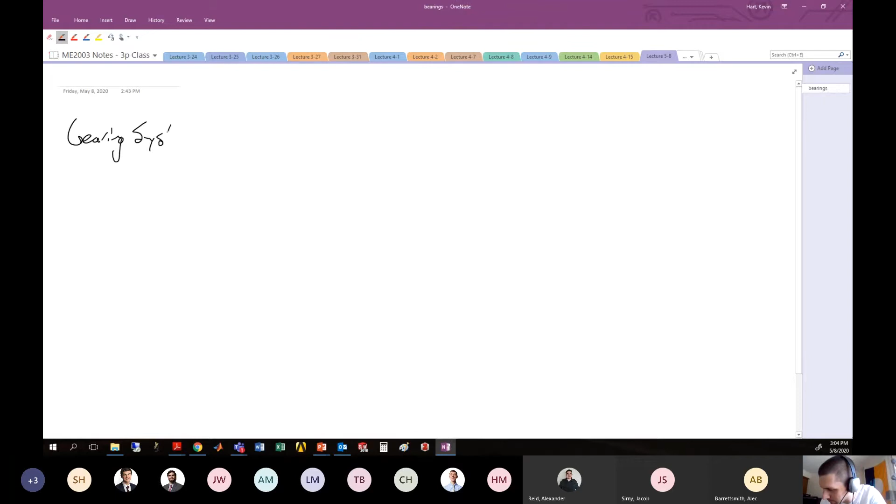All right, gears or gearing systems. We're going to have to spend some time on the front end here just working through vocabulary, which is a little bit sucky. We're going to just have to introduce them a little bit and talk about some verbiage associated and some typical gear systems. So not really getting into the depth on the math too much. This lecture might be a little slow, but we'll get there with a little bit more depth on the lectures to come. All right, so gearing systems. Away we go.

Hopefully we have all seen gears in some sort of capacity in our life before, but the most general model would be something like this. Bam. Gears. And this is as simple as it gets. One gear is driving and the other is driven. The one that's got a motor that's in control of the whole system is the drive gear, or what's called the pinion gear. And this other gear, which is interlocked with that, is going to respond to it and have some translational, linear, or rotational motion of its own.

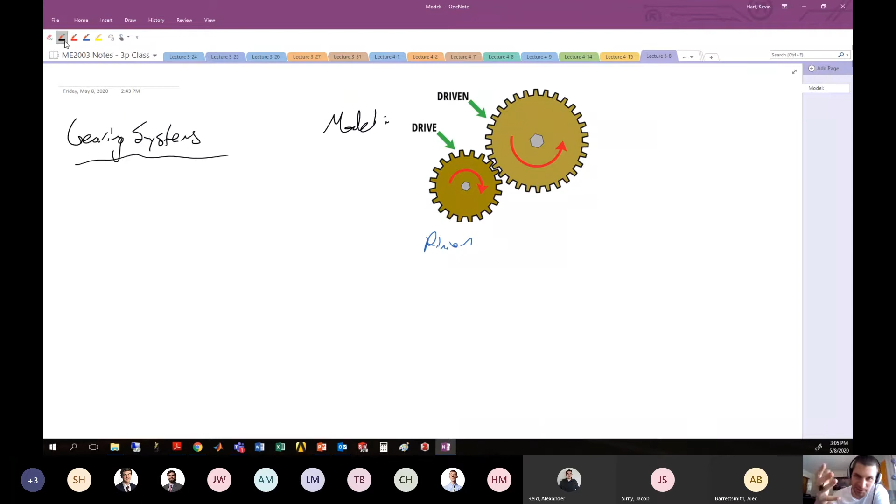All right, so these gearing systems are rotating machines with teeth that allow interface between what would otherwise be shafts, to transmit rotational motion and torque. All right, this is the big one, the torque.

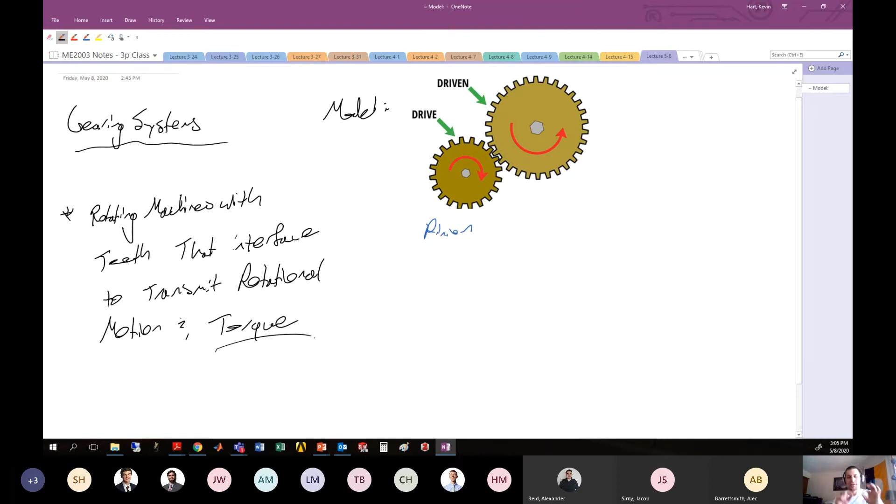A lot of people understand that if you have one gear that's smaller than another gear, the angular velocities of the two will be different, just because one is bigger than the other. So a lot of people understand that you can use gears to step down or step up an angular velocity appropriately for your two shafts that are connected to these gears.

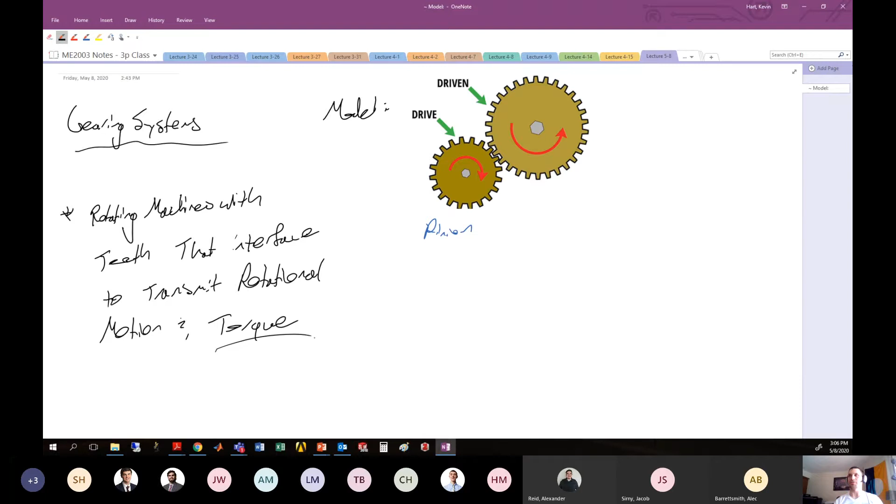But a lot of people lose sight of the fact that there's also a different amount of torque that your shafts can now handle, or torque that you're transmitting with each one of your additional shafts because of this gear ratio. So you can change the angular velocities of these two shafts that are connected to these gears, obviously, but you can also change the amount of torque that each one of these shafts transmit, and that is often lost in the wash when people are too busy thinking about angular velocities of these guys.

All right. So they change output speed and torque of connected shafts. All right, that's kind of what they're useful for, what they're good for.

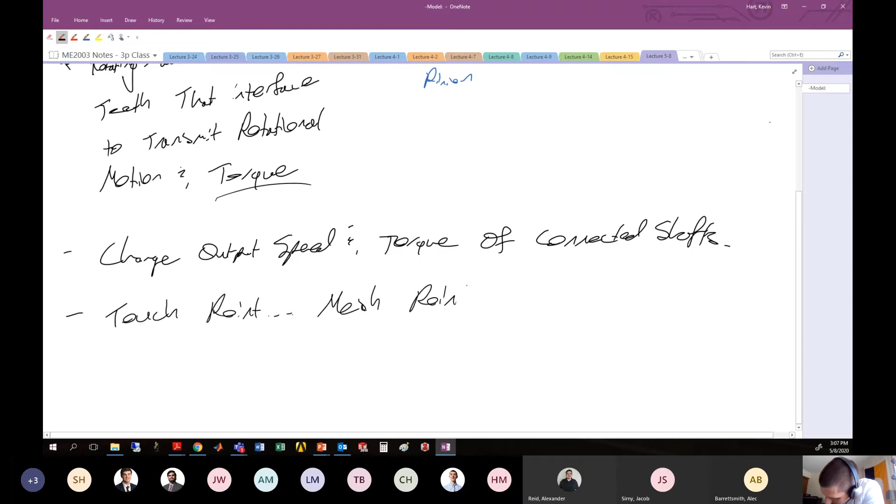Where they're touching each other is called the mesh point. All right, so where they're touching each other, here in this particular example, I guess is like right there. That's your mesh point. All right, or sometimes just called the mesh.

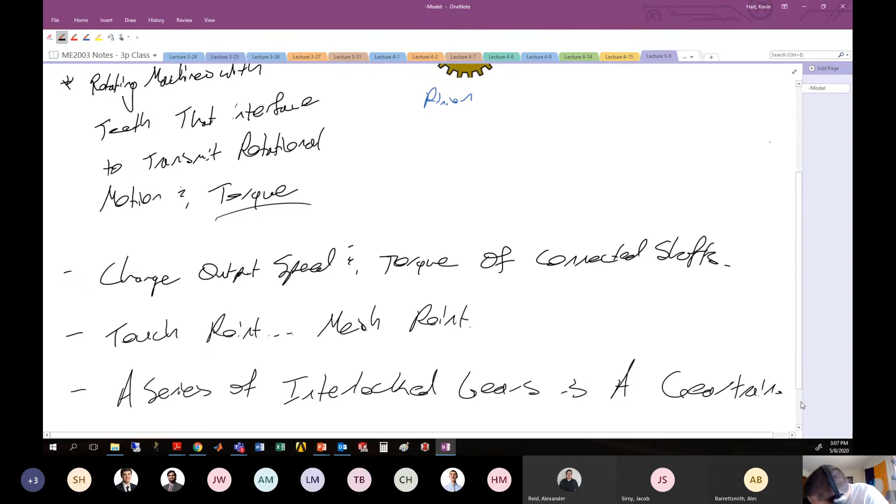We typically talk about these systems in terms of the number of gears that are together in sort of a chain. And so the number of gears that are aligned in a chain is called a gear train. All right, so interlocked gears is a gear train. All right. Often referred to by the number of gears that are in the gear train. So up here, we have a 2-gear train.

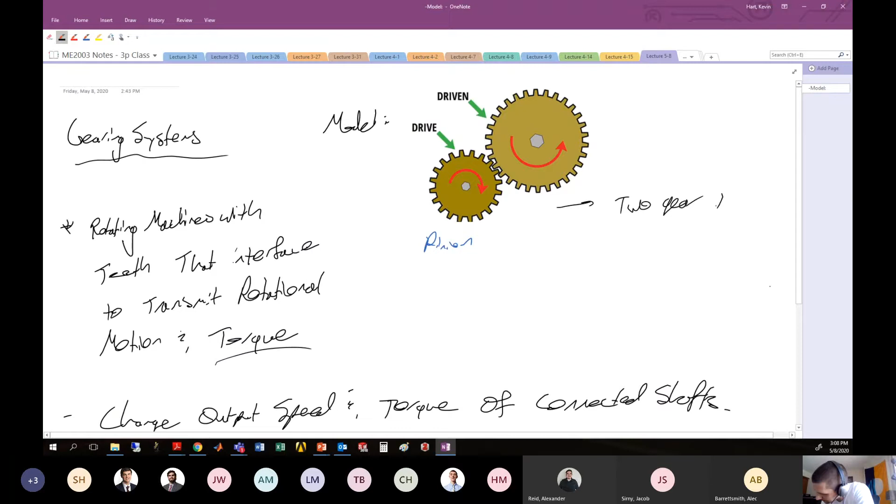Yeah, I had to get a PhD to teach you that. Yep. 2-gear train. I'm highly qualified to teach you about 2-gear trains.

All right. Usually, one gear drives the train. Choo choo, baby. We're driving the train. Sometimes you could have 2 gears in a chain, like in a chain of, or a train of gears that are both being driven by some motor, but that's usually not the case.

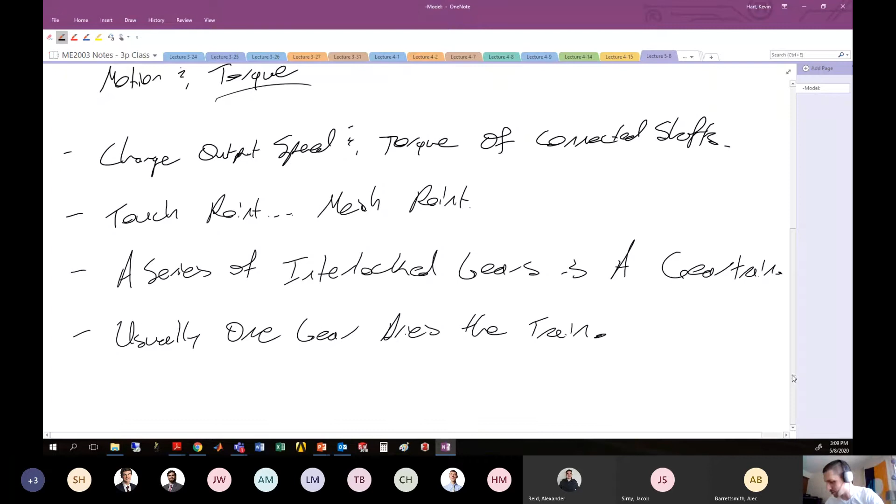It's kind of like the analogy of like 4-wheel drive. All right, sometimes when you have 4-wheel drive, power transmission occurs not just to, like, let's say the front wheels, but also the back wheels as well. So driving your car with all 4 tires. Not really the most efficient, because in some situations they might be fighting against each other. The same idea with like gear trains and gears that are in a series. Usually you'll have one guy that's kind of like driving the entire chain, but you might have a situation where there are 2 guys that are kind of driving this thing because you just need like extra power transmission sometime down the line. So usually one gear drives the train, but sometimes you might have multiple gears driving.

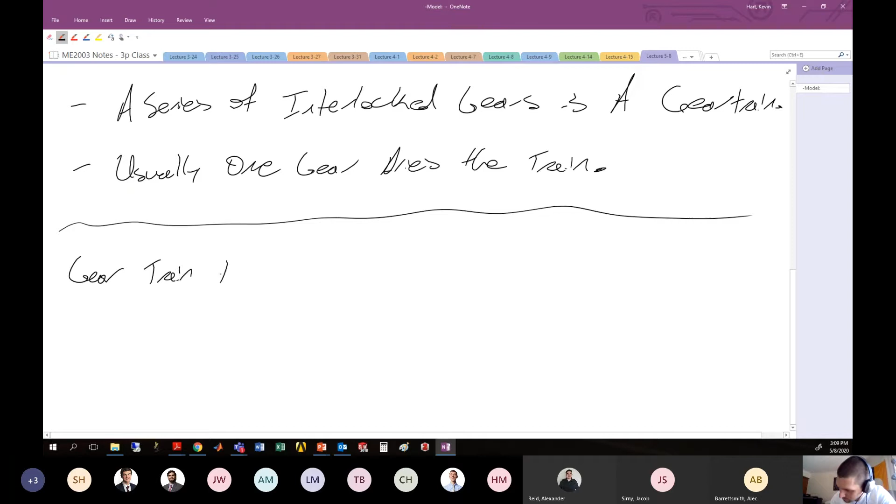All right. So enough of that introduction. Let's talk about some common gear types, or the nomenclature associated with gears that you've probably seen in your life. All right. So gear types. The most common by far, and what we're going to talk about in this class, is the simple spur gear.

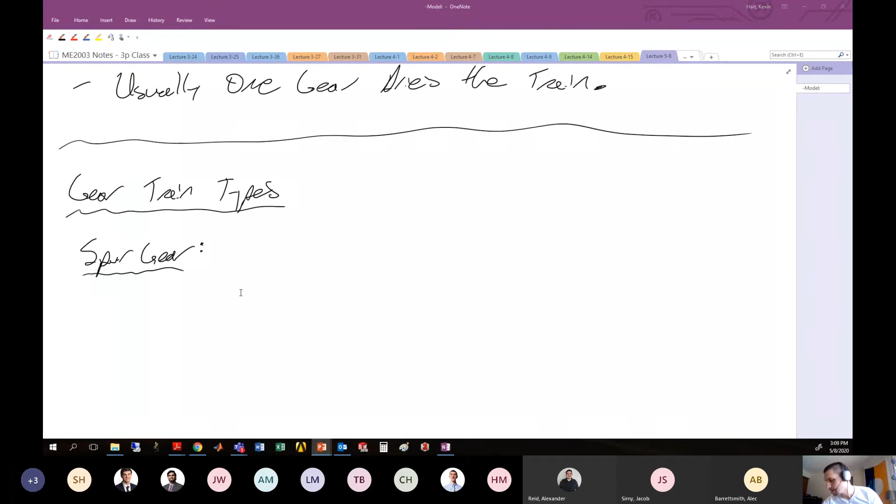All right, in a spur gear, let's put a picture of it up here. I like actually having the iPad for this particular lecture, because when I used to do this on the whiteboard in person in class, I would have to draw this. And yeah, suspicious. Let's just say, to be the least, suspicious.

But here, these spur gears, you have these teeth, which are sort of being represented by these solid black lines in this picture. And they're all sort of parallel or in the same general direction as the shaft of this particular system where the gear is attached. All right, so let's make that point here, is that for spur gears, the teeth are parallel to the shaft. All right, so we can sort of see that happening in both these particular gears.

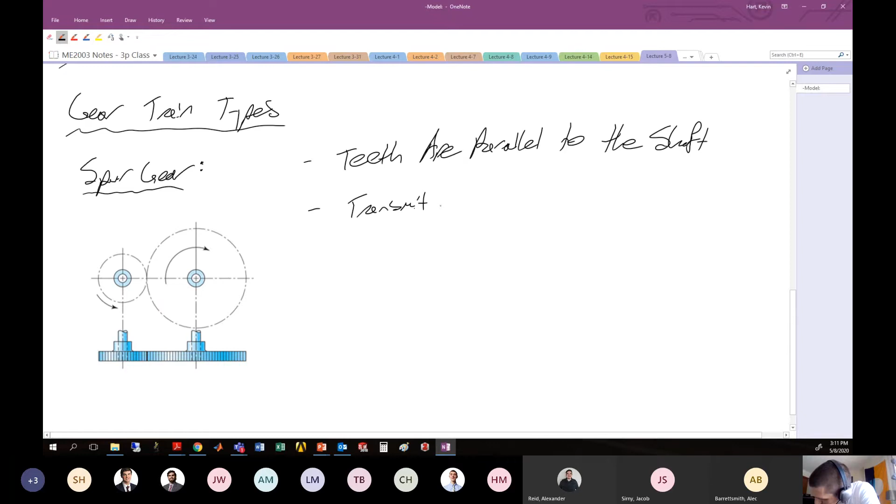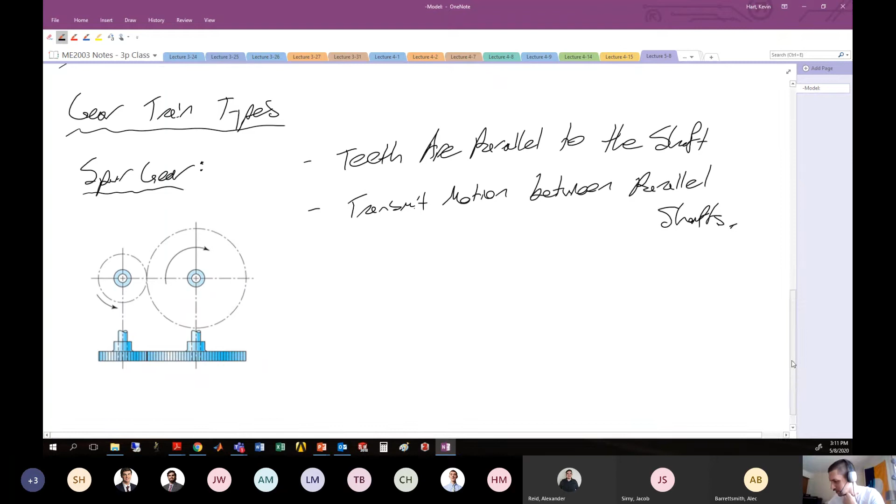All right, so parallel teeth, and they're used to transmit motion between parallel shafts. All right, everything is parallel. The world is right. Rawr. All right, this is what we're primarily going to analyze in this particular class. All right, parallel teeth, parallel shafts, very simple idea.

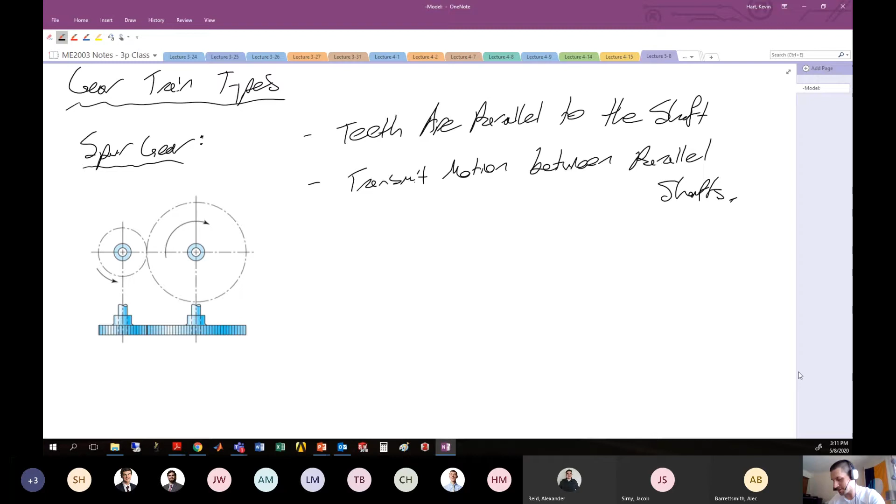The next level up in complication from the spur gear is the helical gear, which looks very similar, except now the teeth are not necessarily parallel to the shaft. All right, so the next level, we just leveled up. Pretend it's a video game. I know you guys are probably playing a lot of video games these days because you got to stay inside. Rawr.

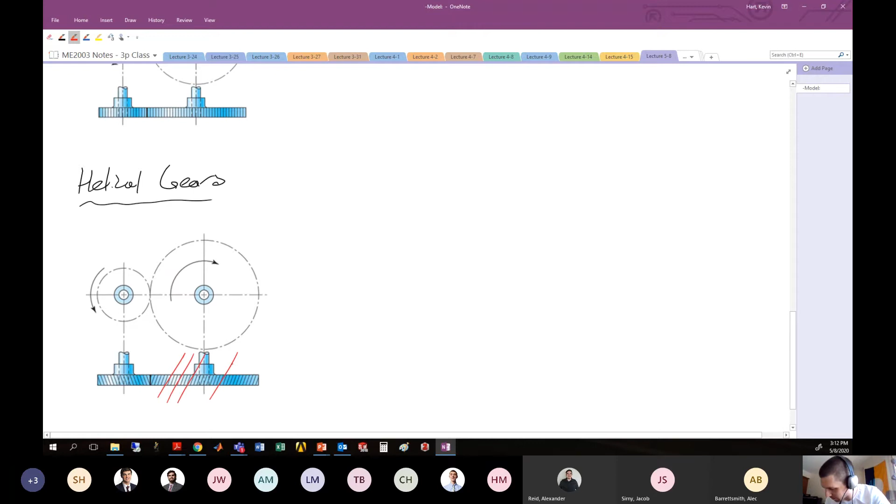All right, our helical gears. All right, so these are still kind of transmitting motion between usually parallel shafts, but not always. And here, the teeth are not necessarily parallel to the shaft. So here's our helical gear. Let's see if I can make this bigger. All right, here's your helical gear. And unlike the spur gear, which had these like parallel lines, now we have the helical gear, which has these lines that are kind of like at an angle. These teeth are at an angle with each other. And so they have to marry up appropriately, so you sort of see the teeth that are offset as such. Right. These are basically the same as spur gears with a couple of caveats.

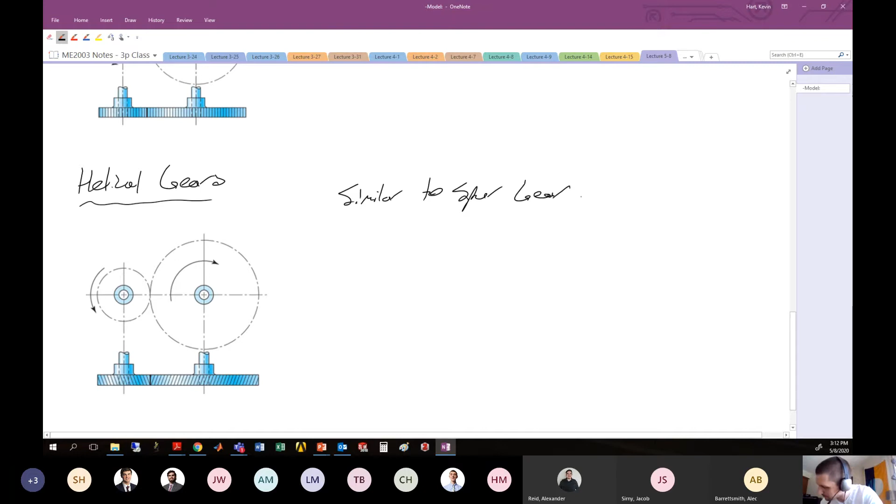But the differences are, helical gears are less noisy. So if noise is a concern for you in an engineering application for whatever reason, your helical gears are less noisy. And that's because when the teeth are interfacing with each other, it happens gradually, right? So you have one tooth kind of moving into each other in sort of a wave type motion, where it's not necessarily just hitting all at the same time, right?

So with the spur gears themselves, you have these teeth that are parallel with each other that will come into contact with each other at a discrete location all at the same time. So with the spur gears, it's like bang, bang, bang, bang. Okay, but with the helical gears, it's more gradual, right? It's like a slower motion, and that creates a less noisy situation. Okay, another way in which they differ is that when you have helical gears, there will now be force that's transmitted along the axis.

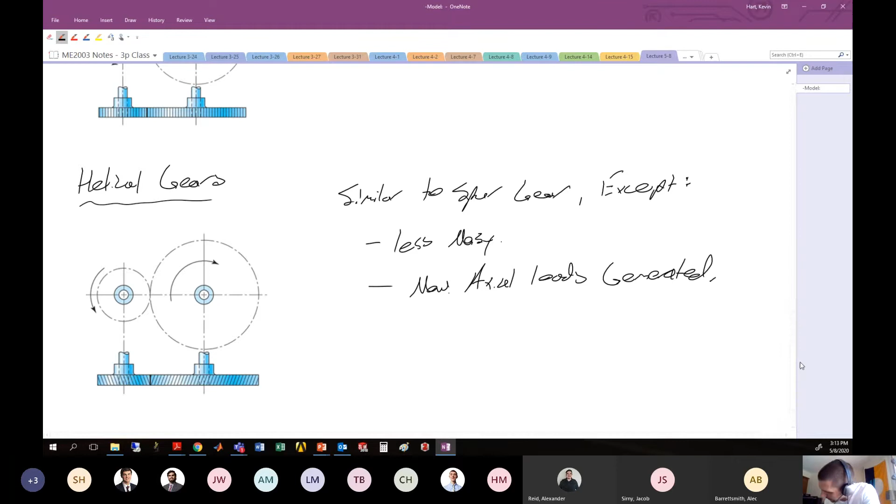All right, and that's easy to see. So if this guy happens to be rotating in this general direction with this angular motion, then this guy is going to be rotating in this direction, and that's going to cause force on this particular gear, which is normal to that particular tooth. So right at that interface, that gear is going to want to push on the other gear in that general direction, and to fight back, this guy is also going to have to push back on that guy with a similar magnitude. And what that results in is that one pushes on the other and they have to push back against each other.

So what's going to happen is this guy is going to want to try to move generally this direction, and this guy is going to want to generally move this direction. So if you don't have them secured in this axial fashion and you try to spin them against each other, they'll just slide against each other and won't actually transmit any angular motion. So you need axial restriction. That's usually accomplished by some bearing that can accommodate axial thrust. So an axial thrust bearing is common for helical gears.

All right. Lastly, the way that they differ is that obviously the teeth are not parallel to the shaft. And so shafts don't need to be parallel, meaning that you can transmit motion between these types of gears with shafts not being parallel to each other. So for the spur gear, we saw that they had to be parallel with each other to transmit any motion.

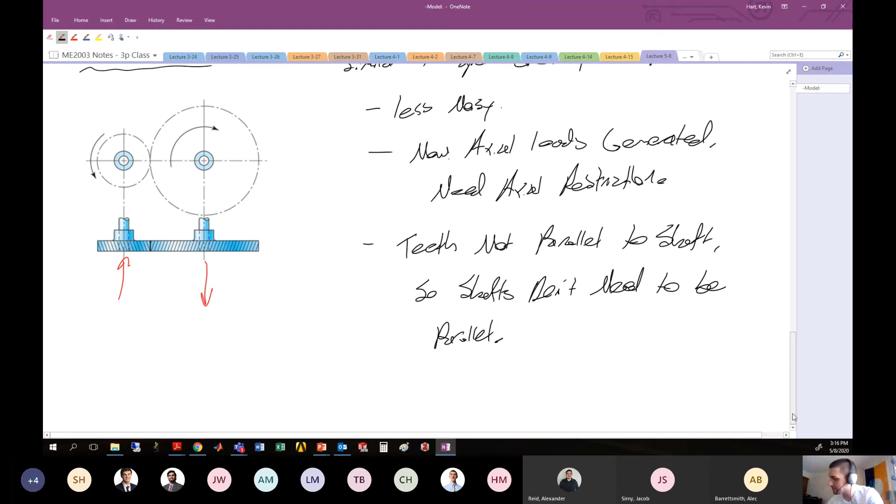All right, so think of these two little pen caps as these spur gears rotating with each other. Not the case when you have the helical gears, where they could be at some weird angle like this and still transmit motion between themselves. Just now, there's axial force that's being generated in those guys. All right, so there you go with your helical gear, or sometimes it's called a helical spur gear because it looks a lot like a spur gear, except it just has these angular teeth.

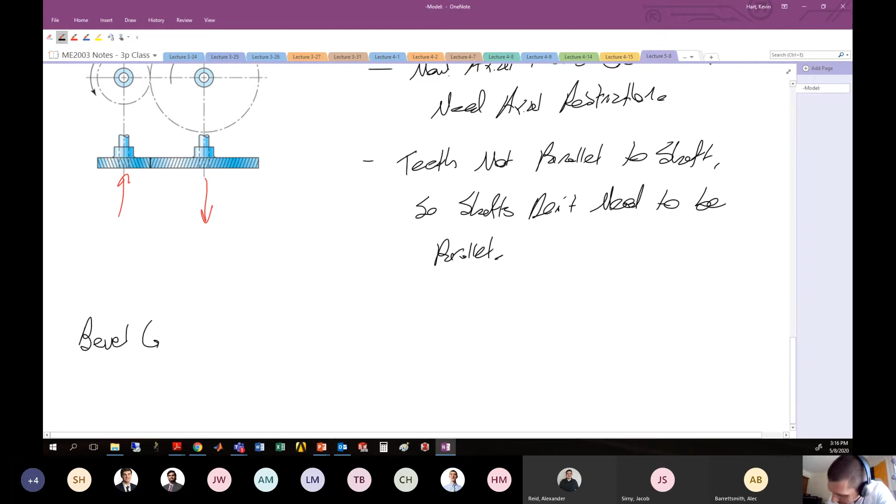Next is bevel gears, which are angled or transmitting information between shafts that are 90 degrees with each other. Next, bevel gears. Rawr. Get on my bevel.

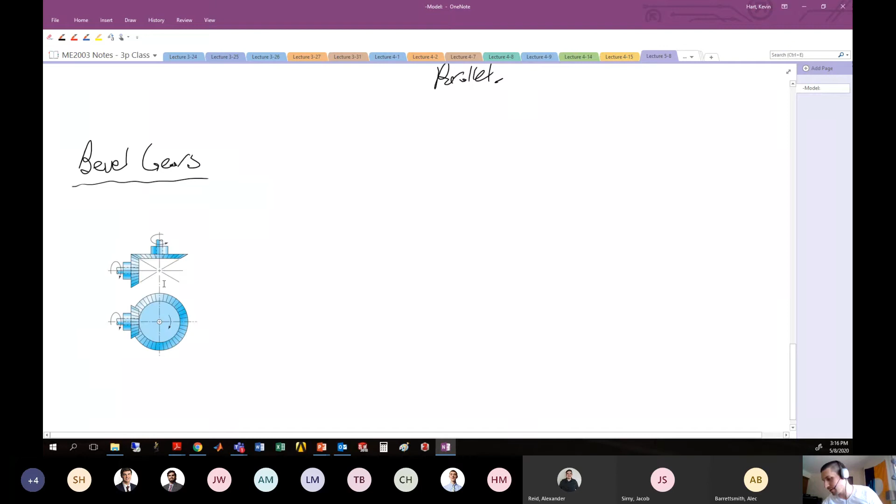So you've probably seen bevel gears before. They look like this. Again, I don't have to draw it. It's really nice. You should see me try to draw this one on the board. Yikes. Very suspicious. All right. Here we've got an interface between shafts that are 90 degrees with each other, or they don't necessarily have to be 90 degrees with each other, but that's the most common situation. All right, so here teeth are formed on a conical surface.

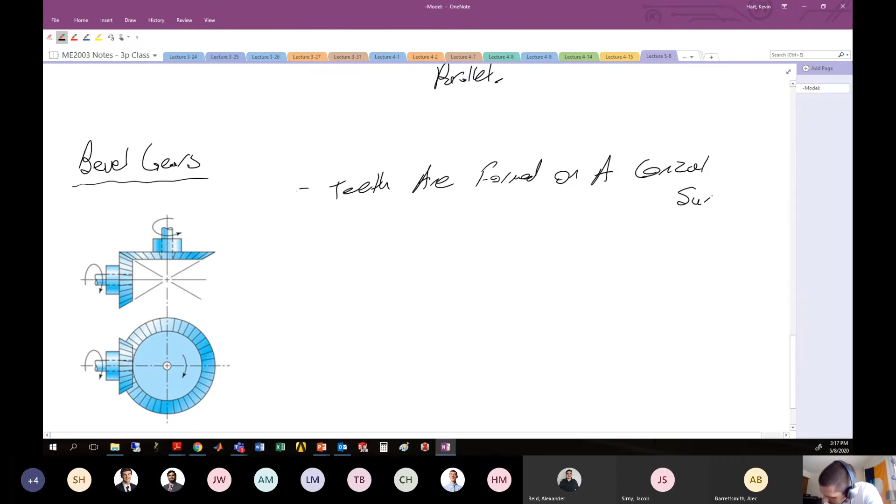All right, so the conical surface of interest here, if you're looking from the top, this triangle here is like the side projection of a cone, right? This is the base of the cone and it's coming to a tip right at the center here. Hopefully you can see that conical surface. And if that's the case, then here are the teeth lying on that conical surface. So there's your teeth on a conical surface.

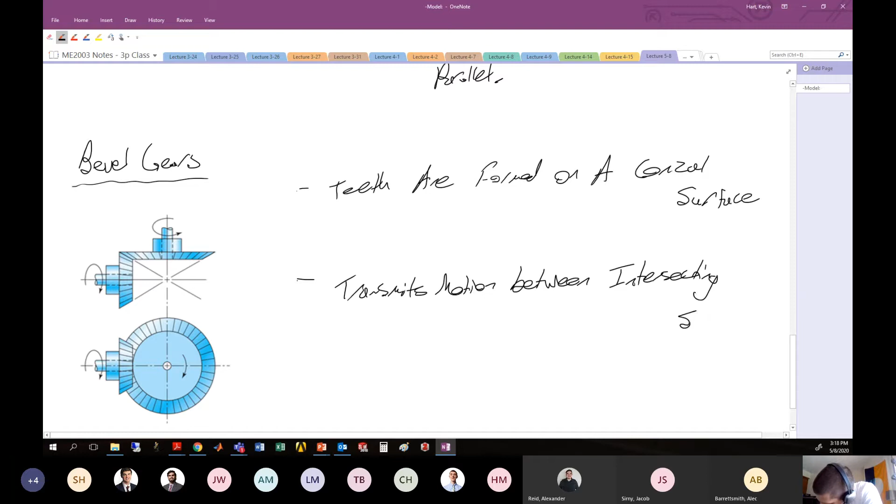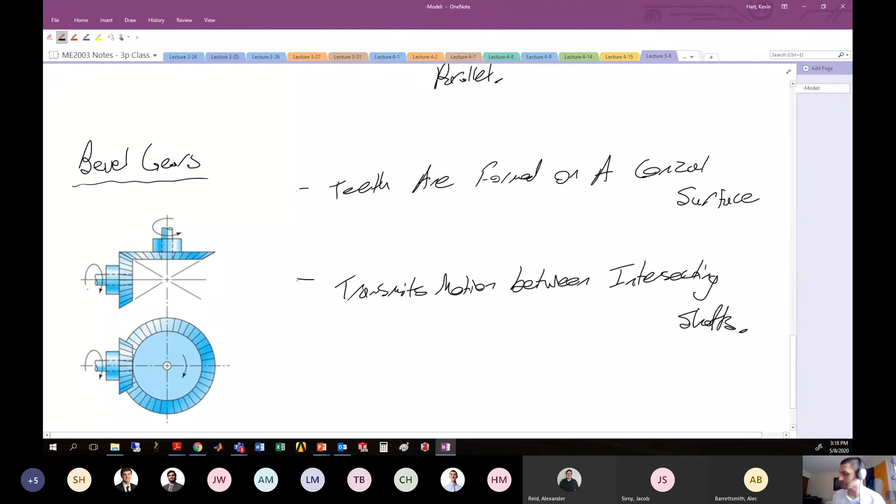And what this allows is you to transmit this information between shafts that are 90 degrees to each other, right? So in this particular case they're 90 degrees with each other, but it could be some other angular position as well. So it transmits motion between intersecting shafts, or what would be intersecting shafts. If we thought about this shaft here intersecting with this shaft here, you have to input the gear here so that we can transmit the power and the angular velocities appropriately. So, intersecting shafts, bevel gears.

I used some bevel gears this summer. It's kind of a cool little project that I was working on. So they're common for transmitting information between things that are about 90 degrees apart.

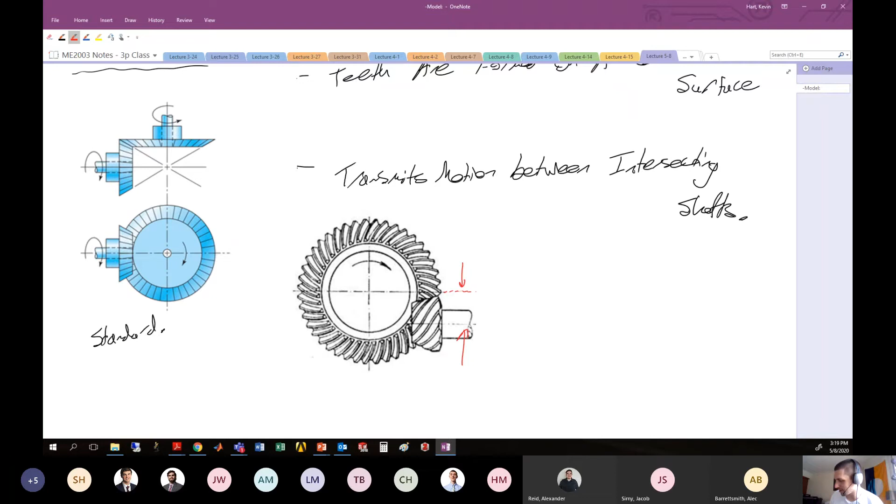So again, they're shafts that are 90 degrees from each other. Here's shaft number 1, and then into the board here is shaft number 2. And what I mean by offset is that the center axes of the shafts of these two different systems are not on the same plane. So they're offset from each other. And then it's hypoid because it has this very strange alignment of teeth. We see this angular alignment of the teeth, and these are hypoid teeth. So this guy here is called a hypoid, or sometimes a hypoid offset bevel gear.

It's not as common, but sometimes when you're in tight, confined mechanical spaces, you don't have a lot of options. So sometimes you need some crazy looking teeth and crazy gears. Look at the teeth on this thing. That's crazy, how spiral looking they are. To manufacture that thing would be a pain.

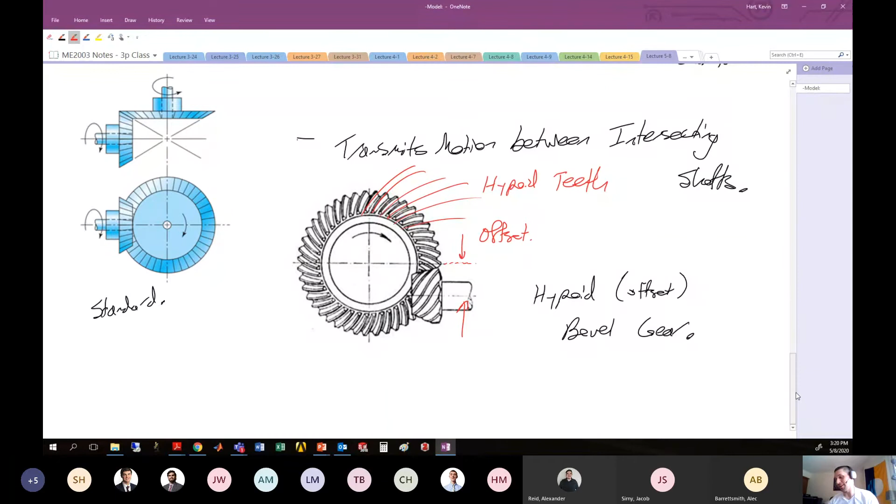All right, so you've got to manufacture those gears. They're really expensive. Even spur gears by themselves are expensive if they conform to proper standards. Just a standard spur gear costs like $50 for a tiny little spur gear. So if you're talking about these hypoid bevel gears, they're hundreds of dollars to get this system going. Expensive, right? I don't have that kind of money. I'm just a teacher. They don't pay me the big bucks. They pay me the little bucks, but at least they pay me some bucks.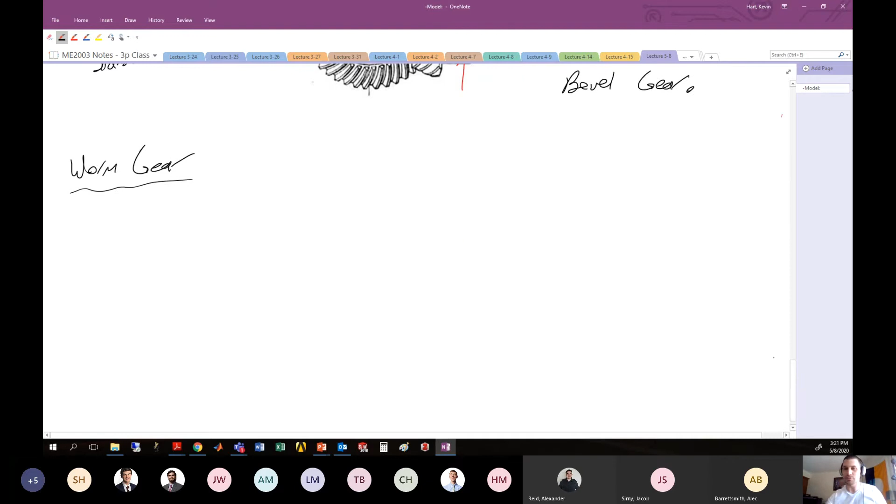Lastly, there's another system that pops up from time to time and is in your vehicle, and that is the worm gear. The worm gear allows you to go from linear motion to angular motion. So here's a picture of a worm and a worm gear. The idea here is that you want to drive the worm in this linear fashion. If I move that worm in a linear way, it's going to cause the teeth to make the gear turn around.

So linear motion here will excite this angular motion because of the way these teeth look a bit like a screw, digging into that worm gear. So this linear motion translates to angular motion of something. It resembles a screw, and translates linear motion to angular motion. This can also be done with a rack and pinion in a similar way, but worm gears are more exciting.

And this is a very common apparatus that is used for your windshield wipers. You think about your windshield wipers, there's a worm gear attached to the base of your windshield wiper. When you push that worm gear and cause it to spiral, your windshield wiper does this. And then when you pull it back, it comes back. So you have this motion that causes your windshield wipers to move. So that's how your windshield wipers work.

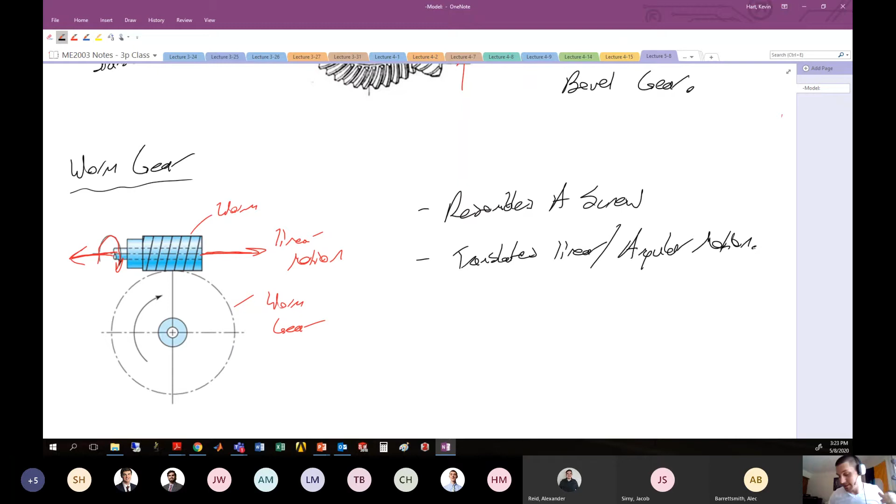Congratulations, I just taught you something new, probably. Unless you're a car junkie and already knew that. Maybe some of you are. All right, mechanical engineers, likely some car junkies out there that already knew that.

But it's a general idea. You have non-intersecting, non-parallel shafts, and you're transmitting information.

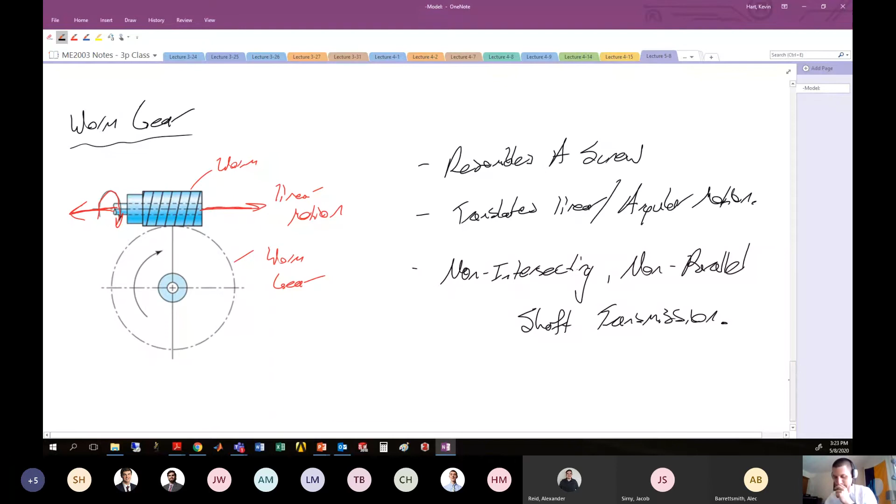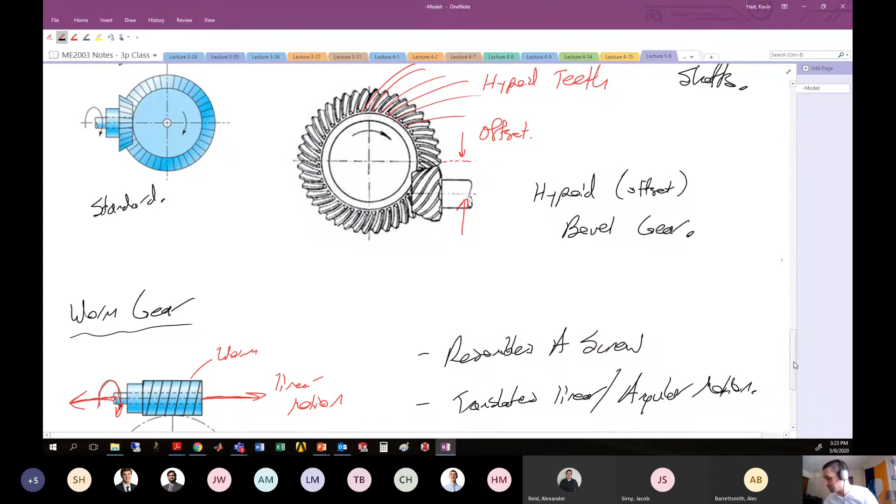Non-intersecting, non-parallel shaft transmission. There you go. It's like the extreme example of this hypoid bevel gear. The teeth look very similar on this worm. It kind of looks like a screw, and it's an extreme example of this situation here. All right, so there's your worm gear and worm.

All right. Now we have to get into a little bit of boring stuff, and I'm sorry it's not going to be that exciting. We have to go through some nomenclature because part of this class is being able to use vocabulary correctly to describe gears. So buckle up, get the coffee, stay awake while we go through some vocabulary that might not necessarily be as exciting. We have to go through some nomenclature.

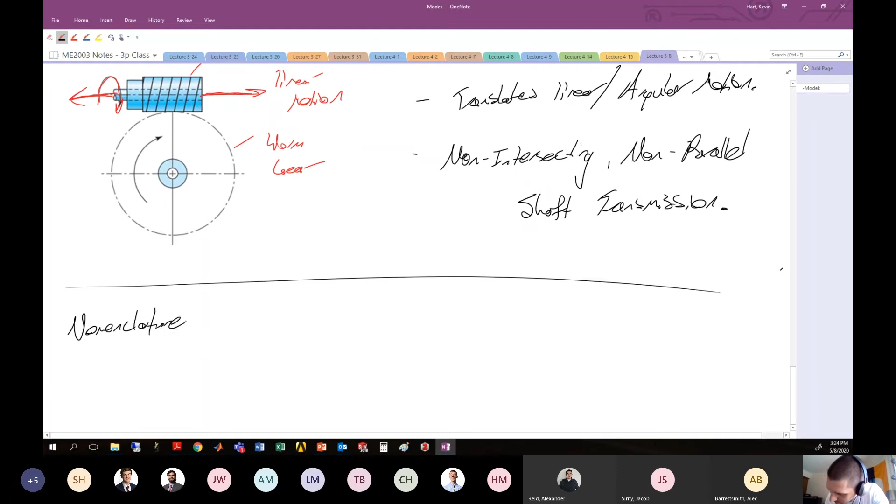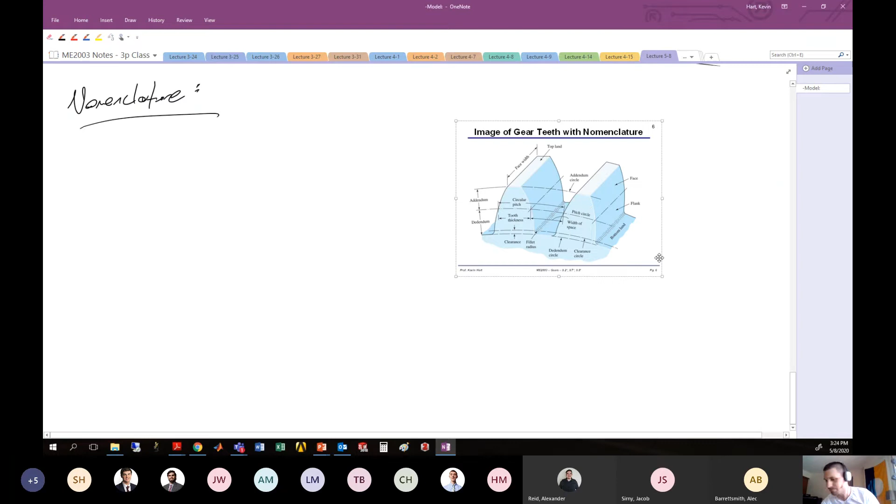Before I dive in on this nomenclature, I'm going to put up a picture of this gear and these gear teeth, because I think it helps to see the picture and talk through it when we're introducing this general vocabulary. So here's our picture, and I'll refer back to it as we go, instead of trying to draw it myself. You don't want that to happen. We've all seen what happens when Dr. Hart tries to draw pictures. It ain't pretty.

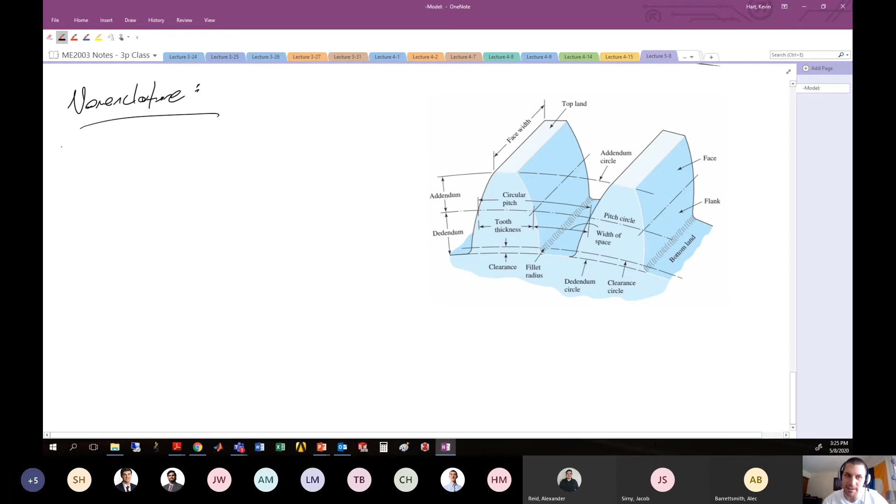First things first, we have to talk about the pitch circle and the pitch diameter. The pitch circle is the circle upon which all of these gear calculations are based. We can see the pitch circle in this image. Here are some teeth on a gear, and the pitch circle is this line here, a partial pitch circle. It is the location in the center of the teeth where the gears interface or mesh. In English, we would say this is the theoretical circle upon which calculations are based.

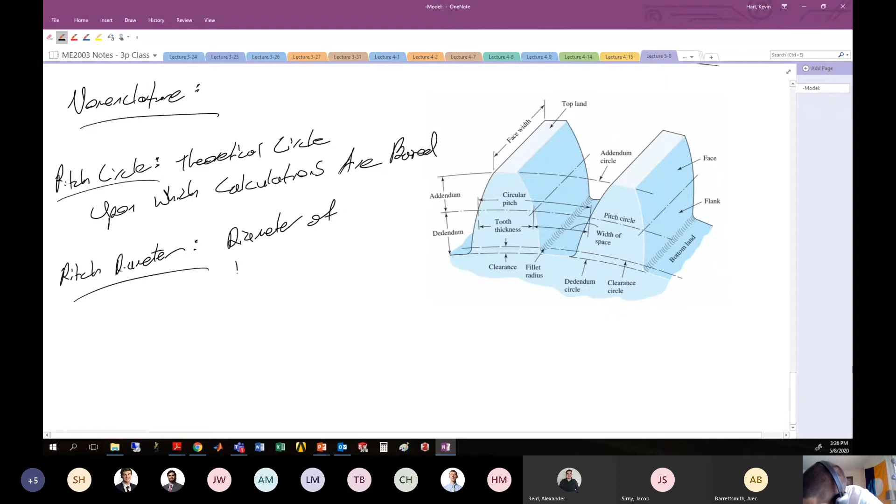All right, so there you go. This pitch circle has a pitch diameter, and obviously it's the diameter of the pitch circle. Again, here's my pitch circle. If it went all the way around, then the diameter of that circle would be the pitch diameter. Hopefully that's understood. Again, a PhD is required to teach this too.

All right, next, the pitch circle, not to be confused with the circular pitch. How could you get that confused? The circular pitch is the distance between teeth, not the space between teeth, but the distance from one point on a tooth to the same point on the next tooth. If we have this point on this tooth, then the distance between that point and the same point on the next tooth is the circular pitch. Notice that's not the distance between teeth; it's the distance you have to go from one tooth to the next. There's your circular pitch.

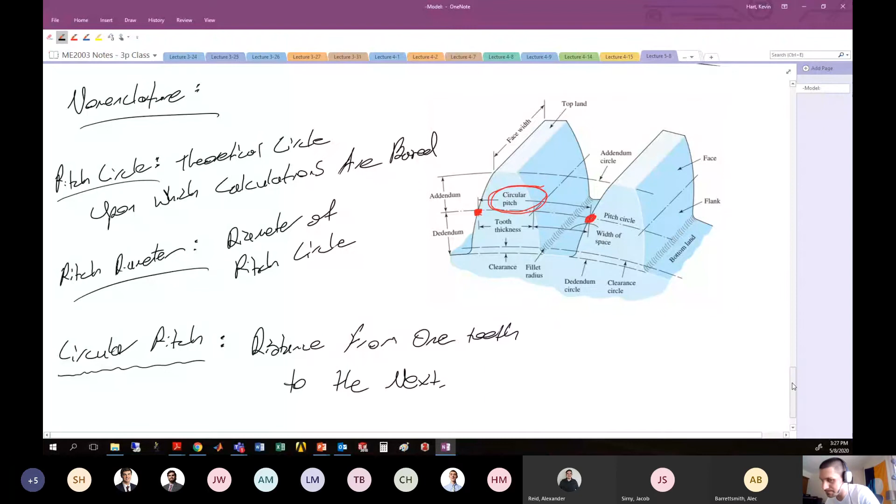It's usually given by the variable little p. It's sort of hard to draw a little p and a big P. That's a little p.

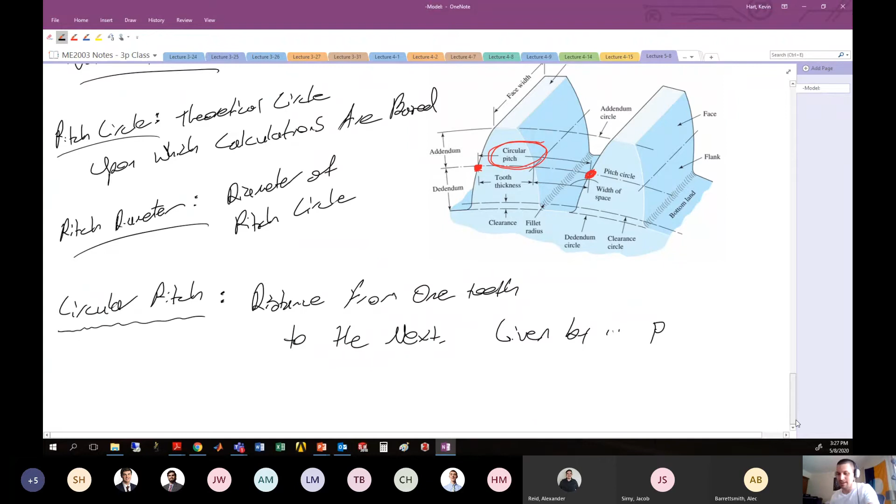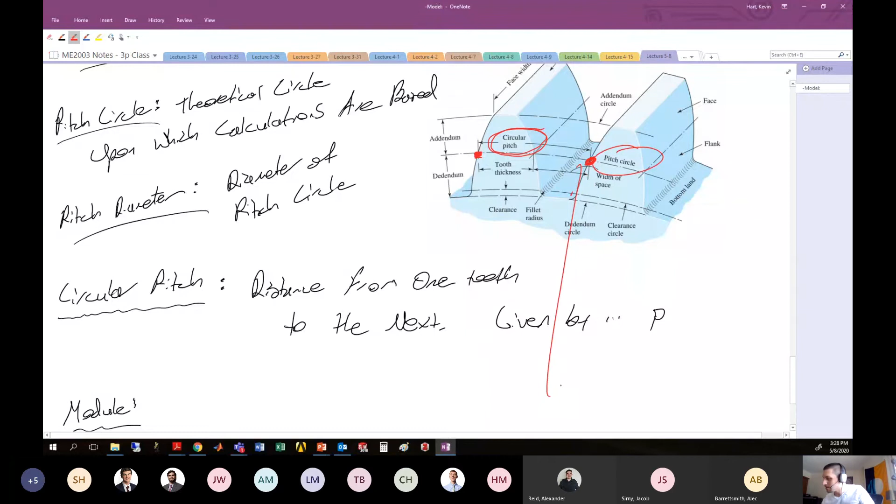All right, continuing. The module. The module's not on this image, but it is also related to the diametral pitch. Let's do the diametral pitch first because it's a little easier to understand. The diametral pitch involves the pitch diameter. Remember the pitch diameter up here: this is the diameter of this circle. Again, here's our pitch circle, and the diameter of that circle is something like that. So the diametral pitch is the number of teeth divided by the diameter of the pitch circle.

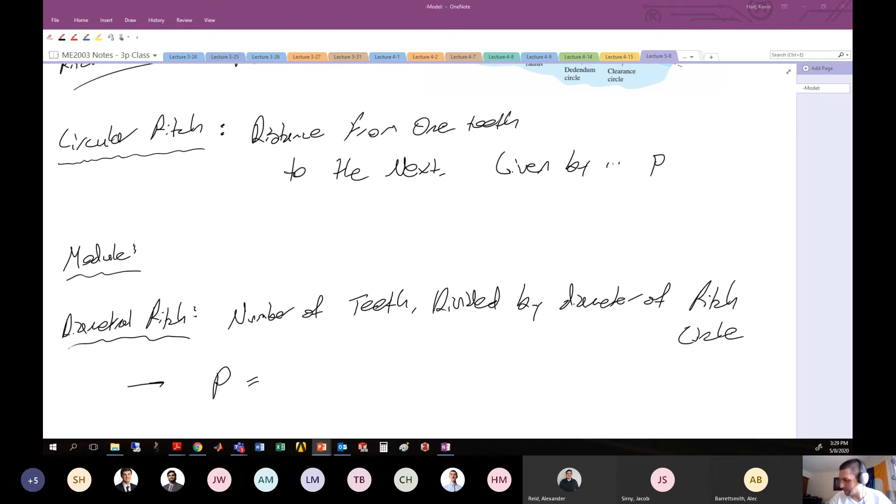Usually the diametral pitch is assigned to the variable capital P. Capital P is the number of teeth N divided by D, the diameter of the pitch circle. So it's how many teeth are there in your gear divided by the diameter of that gear.

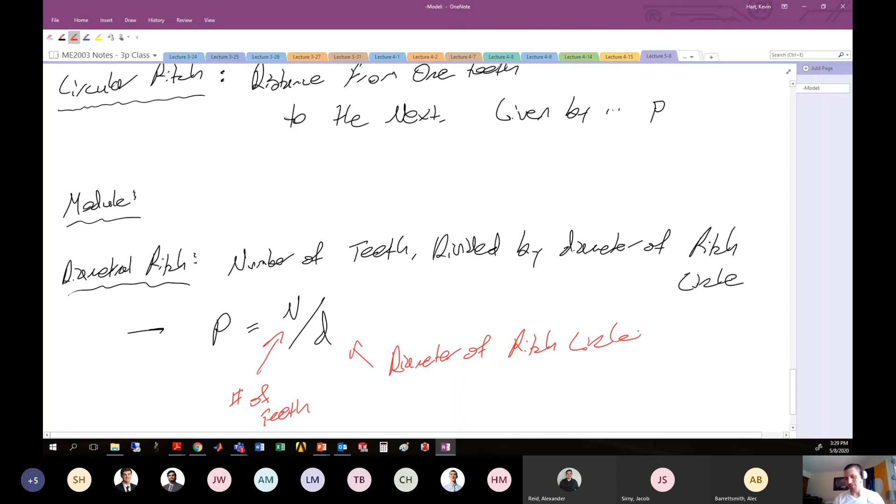One thing that you'll note about the diametral pitch, and this is probably the most important takeaway here, is that mating gears must have the same diametral pitch.

This diametral pitch is an indication of how coarse or fine the teeth are on your particular gear. If I have a gear with a diametral pitch of 2 and a gear with a diametral pitch of 20, the one with 20 has very fine teeth on the edge, and the one with 2 has very coarse teeth. You try to mate those up and it's not going to work. Those teeth won't fit into each other properly, so you have to make sure you have the proper diametral pitch or else it's not going to work.

Let's get back to the module, which is the inverse of diametral pitch. M is 1 on capital P, or you might see it as M equals D on N, where D is the diameter of the gear and N is the number of teeth. So there you go for module. It's the inverse of diametral pitch. Little m is 1 on capital P, which is the same thing as D on N.

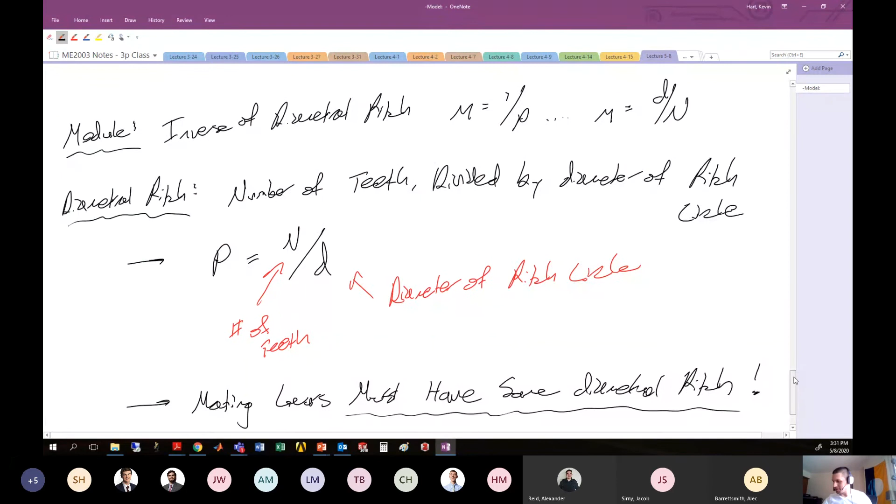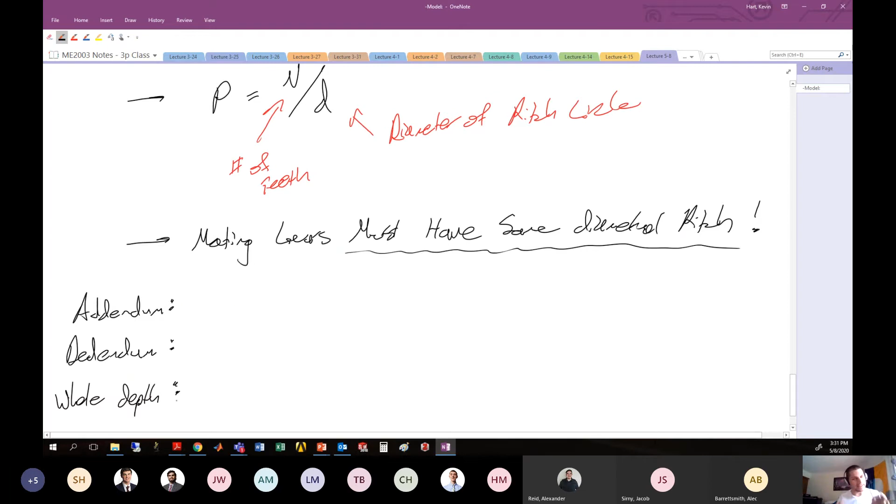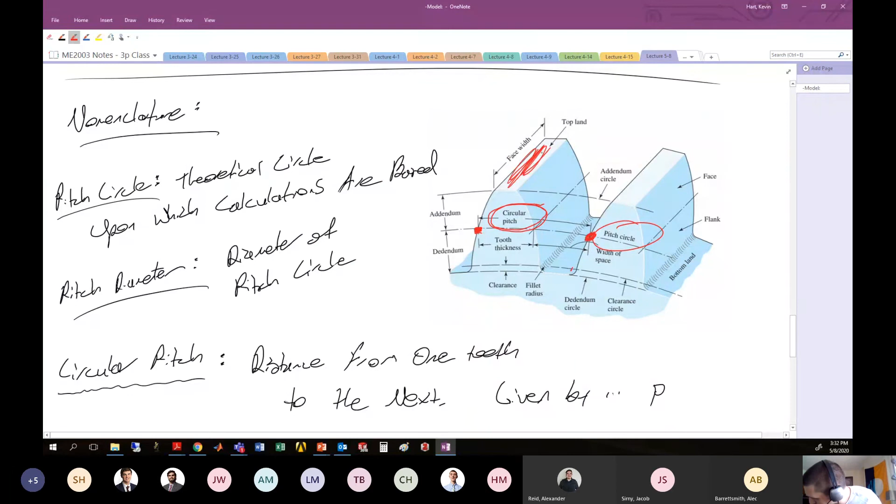Last things we'll talk about for nomenclature, for vocabulary, are the addendum, the dedendum, and the whole depth. The addendum is the distance radially between the pitch circle and the top of the tooth. Here's your addendum. It's the radial distance between your pitch circle, which is here, and the top of the gear tooth. There's your addendum.

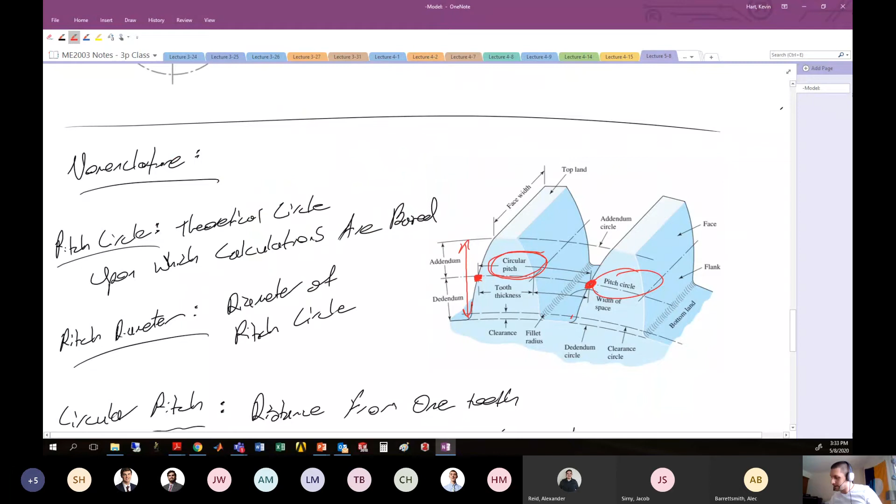Dedendum is similar, except from the pitch circle to the bottom of the tooth. So there you go. The addendum is the radial distance from the pitch circle to the top of the tooth. The dedendum is the radial distance from the pitch circle to the bottom of the tooth. And the whole depth is the addendum plus the dedendum. This is basically the total tooth height, if you want to think of it that way. So here's the whole depth of the thing, addendum plus dedendum.

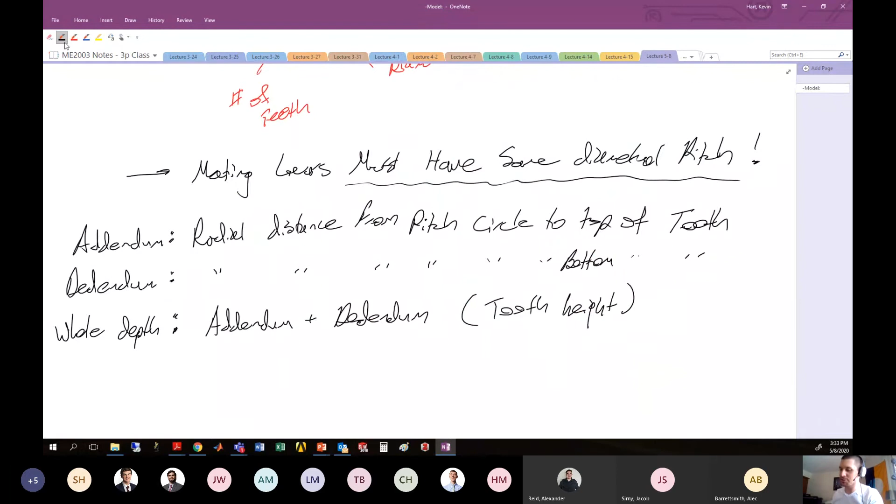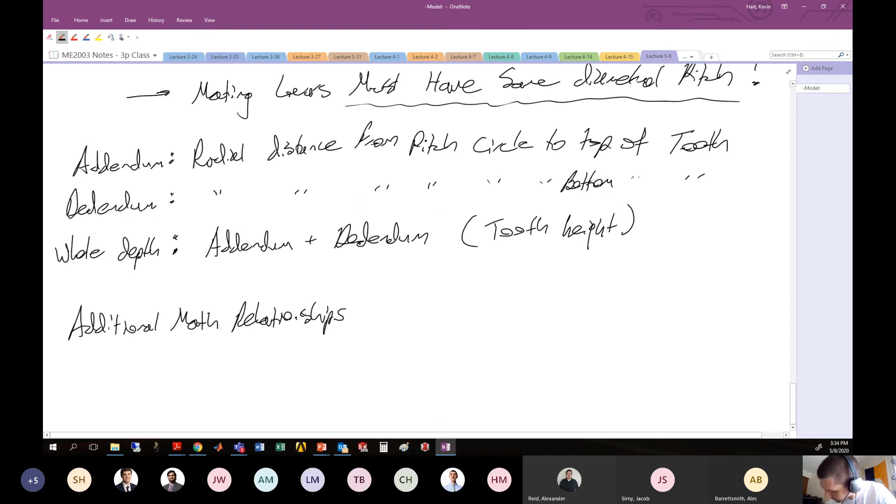Now we've got our definitions, our nomenclature, and our information squared away. Some additional mathematical relationships that you might need. We already talked about the relationship between the diametral pitch, the number of teeth, and the pitch diameter. Let's remind ourselves: diametral pitch is equal to number of teeth divided by pitch diameter. In symbolic form, diametral pitch, capital P, is number of teeth N divided by pitch diameter, little d.

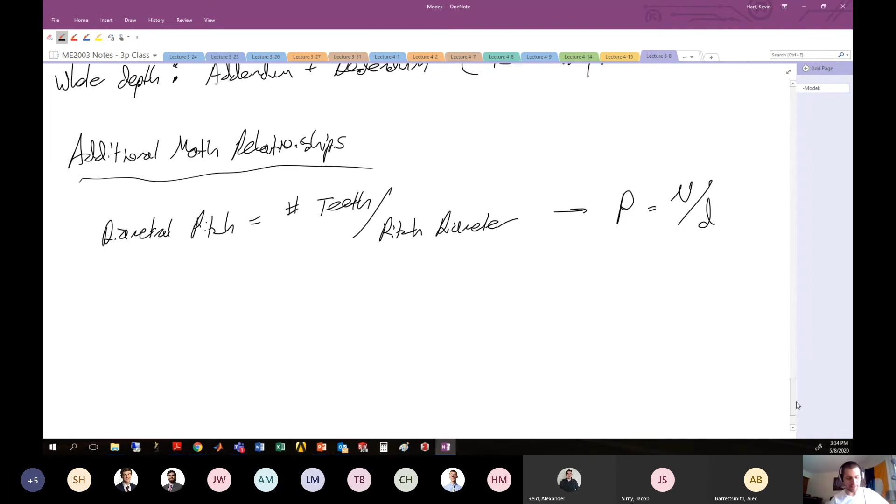We've already talked about this. The diametral pitch of 2 mating gears must be the same. Otherwise, they can't drive each other. If the diametral pitch of one is greater than the other, then the first one has more teeth on the outside than the second one can handle appropriately. So it has to be the same from gear number 1 to gear number 2.

Another relationship is between the module, the pitch diameter, and the number of teeth. The module is the inverse of that. It's the pitch diameter divided by number of teeth. So M is equal to the pitch diameter D divided by number of teeth N, which again is 1 over the diametral pitch capital P. Most of the time, the diametral pitch is prescribed for gears, but sometimes with data sheets, you see it as the module. So they give you the module, and you wonder where's my diametral pitch? How do I know how to make this gear? Well, it's 1 on that number.

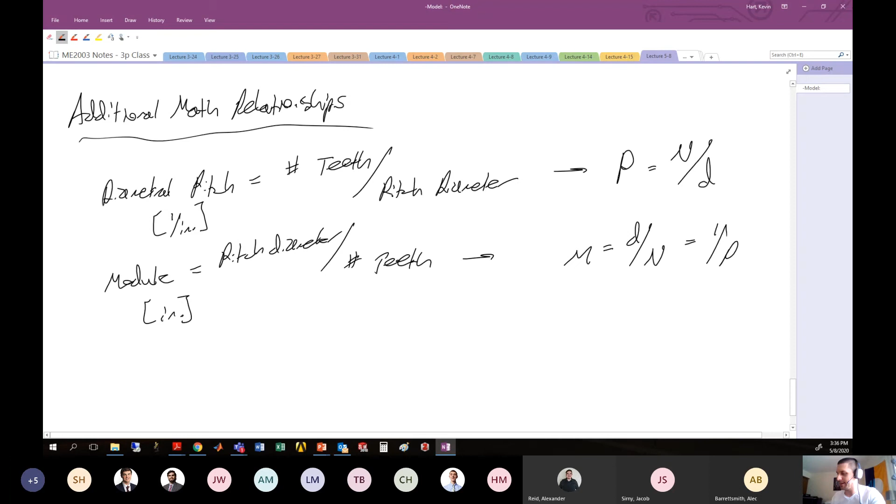Let's remind you, diametral pitch is going to be in units of 1 on inches. And module is going to be in units of inches. Lastly, this is the circular pitch.

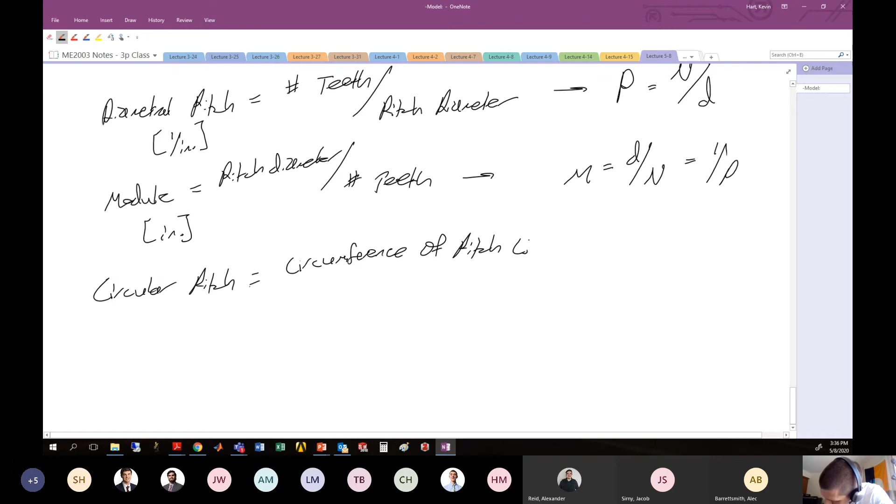This is the circumference of the pitch circle divided by the number of teeth. So circular pitch here is equal to circumference of pitch circle divided by number of teeth. All right. So here, circumference of the pitch circle is just pi times the diameter of the pitch circle. So this is pi times little d divided by capital N. You might also see it as pi divided by capital P. Because remember, capital P is capital N on D.

All right. So these are some of the basic mathematical relationships that you need to know kind of off the cuff and that we're going to use in calculations quite a bit. All right. So let's see one example calculation really quickly, and then we'll get you out of here on a

Friday. Get out and enjoy the 41-degree weather. Oh, come on, man. Let's go, Wisconsin. It's like mid-May. God damn. Imagine if they're like playing baseball right now. It's like 40 degrees out.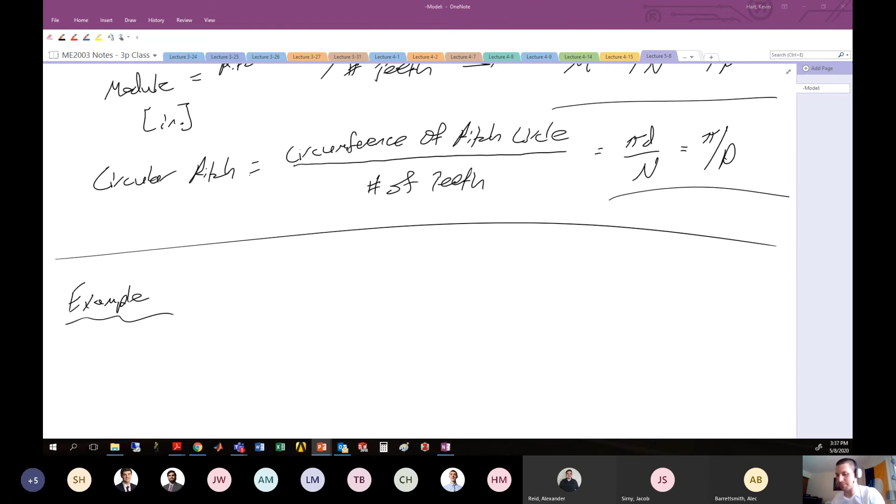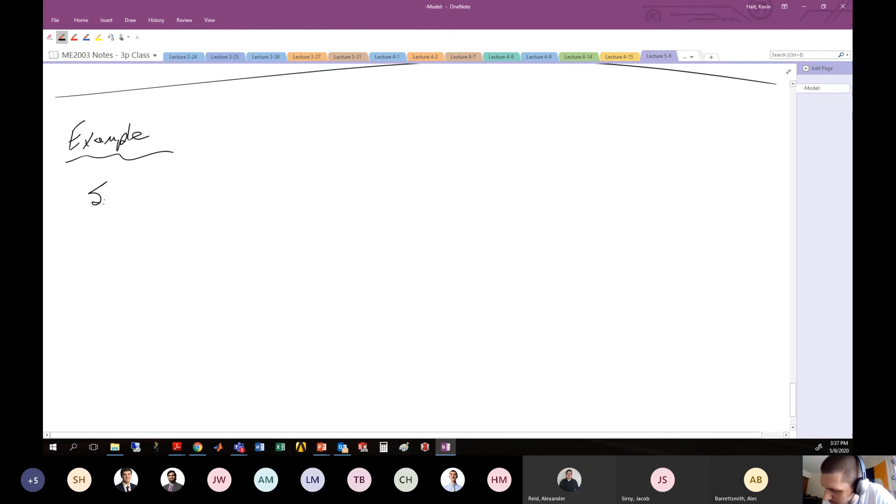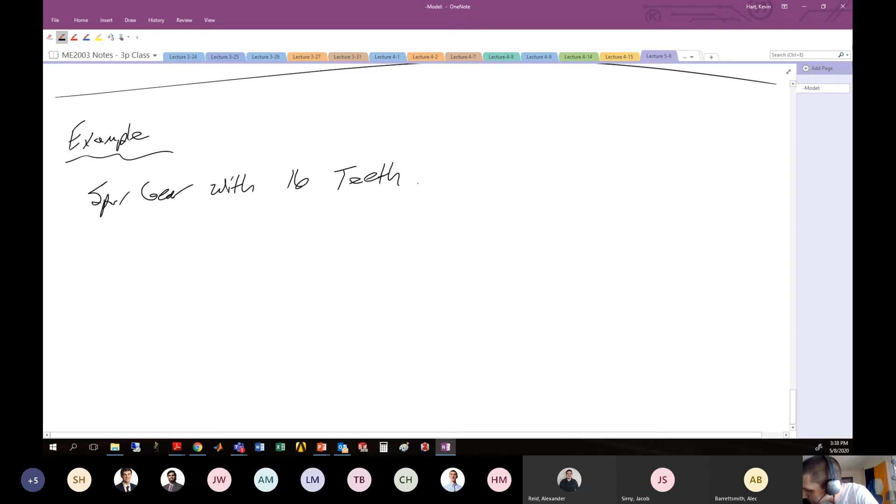God, annoying. All right, let's do an example problem. And this example is in the slide deck in the notes. I'm just going to copy it down by hand here because it's not going to take too long. So here we have an example. And we're given information about one gear that's driving another. All right, so we have a spur gear with 16 teeth. All right, and it's got a diametral pitch of 2. Driving a gear with 40 teeth. And we're assuming that it's mating up well and there's no errors or no issues.

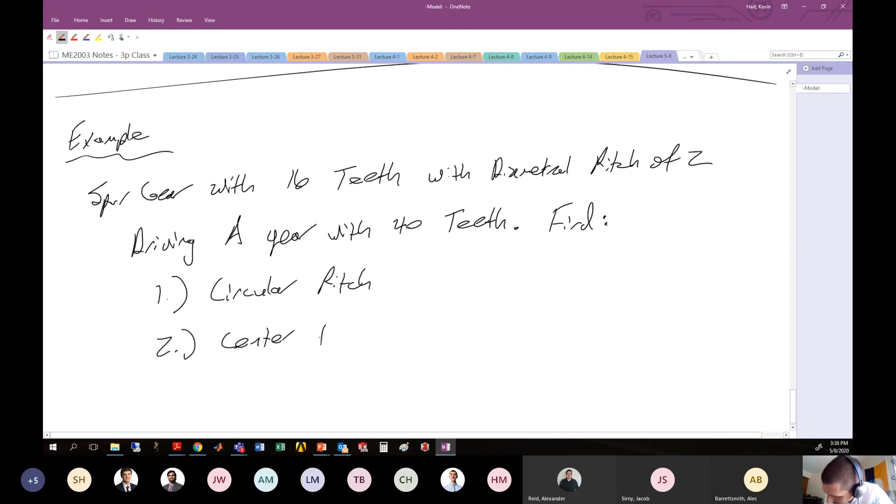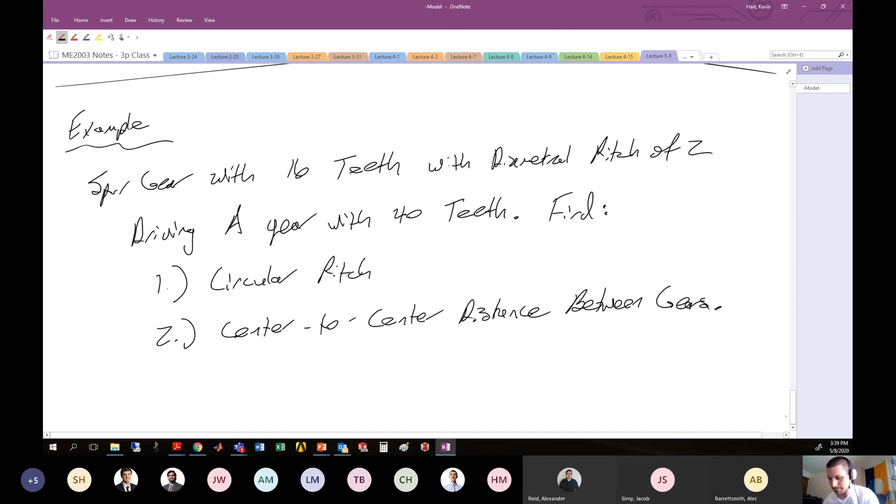All right, we want to find the following. Number 1, we want to find the circular pitch. Okay, this is how many teeth there are per inch on the outside of each one of these gears, which should be the same if they're mating with each other. And we also want to find 2, the center to center distance between gears. All right, so let's get at it. First part, we want to find the circular pitch. So let's remind ourselves what the circular pitch is.

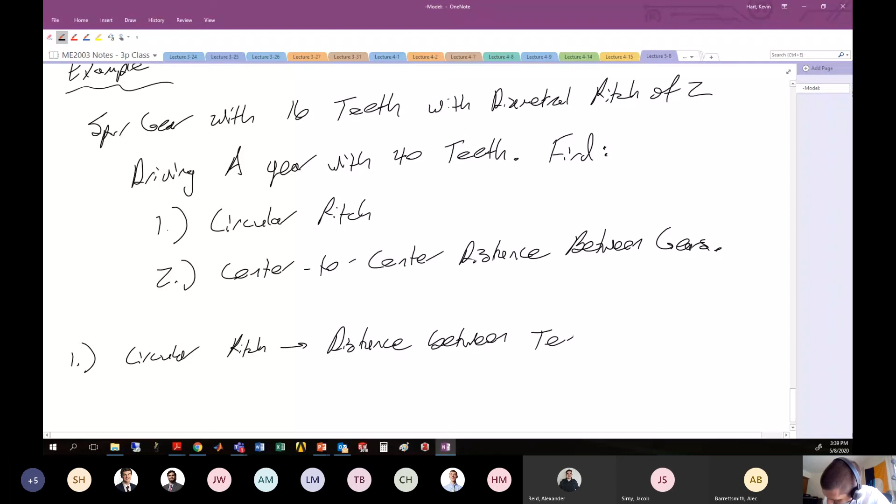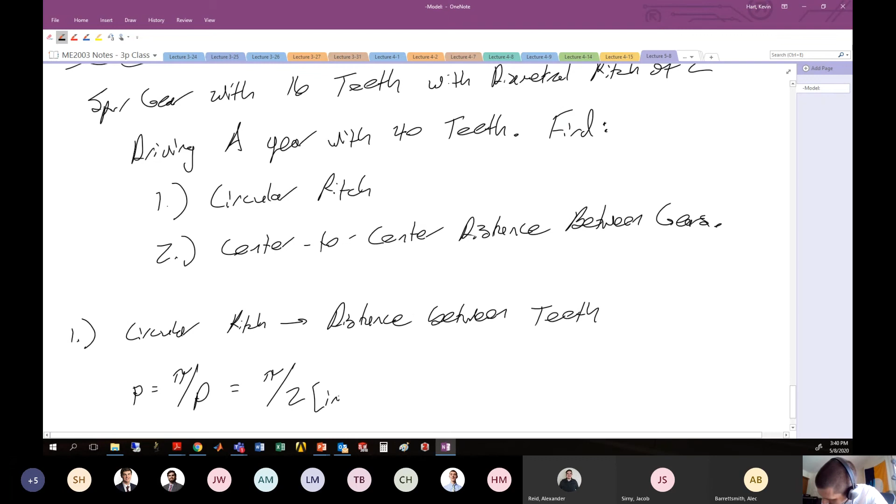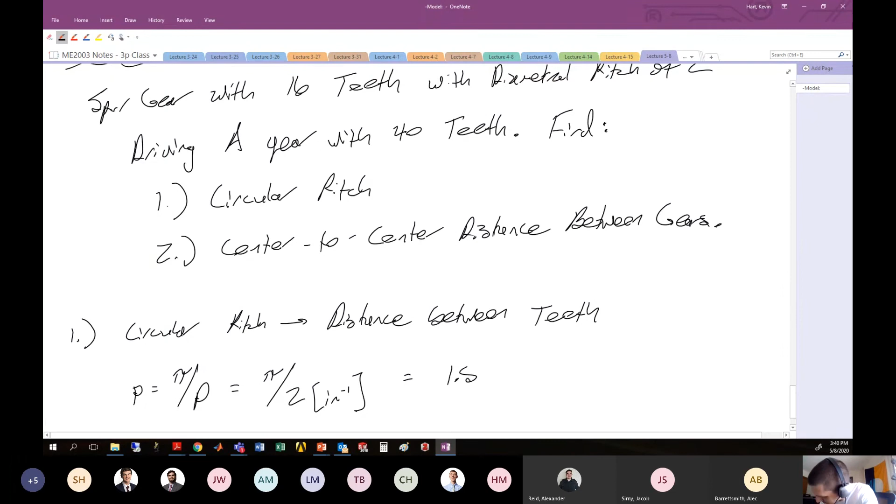All right, so the circular pitch here is going to be little p, which is going to be like pi divided by big P. All right, so here we have pi divided by 2, and this here is inches inverse for the diametral pitch P. So this will leave us with a circular pitch, which is the distance between adjacent teeth on the outside of this particular gear. It's going to be 1.57 inches. Right, so there you go. For the circular pitch, it's the distance between teeth on the outside.

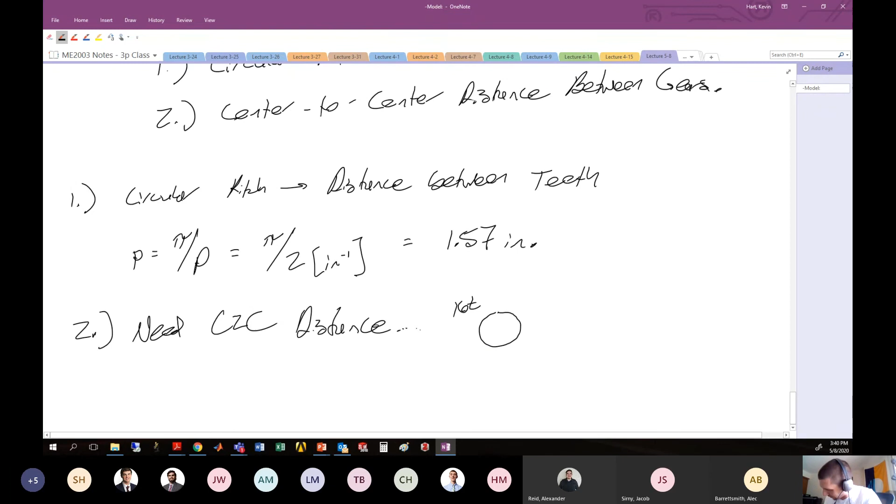2. Now we need the center to center distance between these gears. Center to center distance. All right, so if I have like this 16 teeth gear, usually with 16 lowercase t, and here I have it mating with a gear that's 40 lowercase teeth, I want to know what is the center to center distance here. So here this is center to center distance, and usually we abbreviate this with capital delta. All right, so that's the center to center distance that I'm looking for in this particular situation.

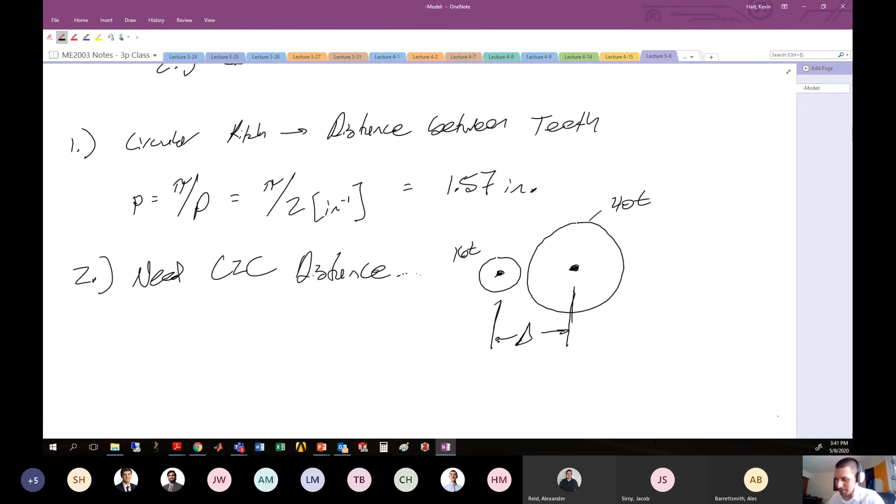So if I need the center to center distance, I'm going to need what is like the radius of each one of these particular gears. And so to get the radius of each one of these gears, I'll get the diameter of each one of these gears, which is the pitch diameter of these particular gears. So we need pitch diameters.

All right, so I need to know what is the diameter of this 40-tooth gear and what is the diameter of this 16-tooth gear. Well, I can do that if I know what the diametral pitch is and the number of teeth on this particular gear. So the diameter of the 16-tooth gear is going to be the number of teeth divided by the diametral pitch.

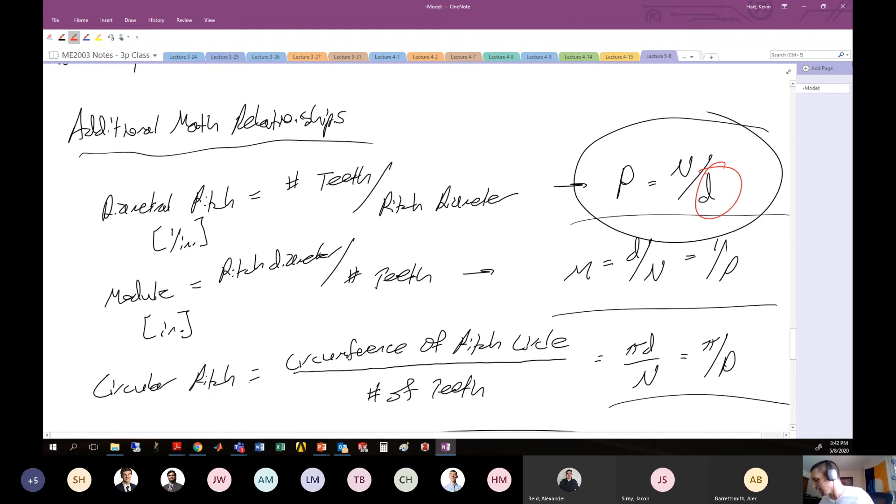And this is just the inverted relationship that we learned for the diametral pitch P. Remember that capital P, all the way back up here, is the number of teeth divided by the pitch diameter. So if I'm looking for this little d, I can invert this relationship, and it'll be capital N over capital P. For the 16-tooth gear, I have 16 teeth. The diametral pitch is 2 inverse inches. And so this will give me a diameter of the first 16-tooth gear of 8 inches.

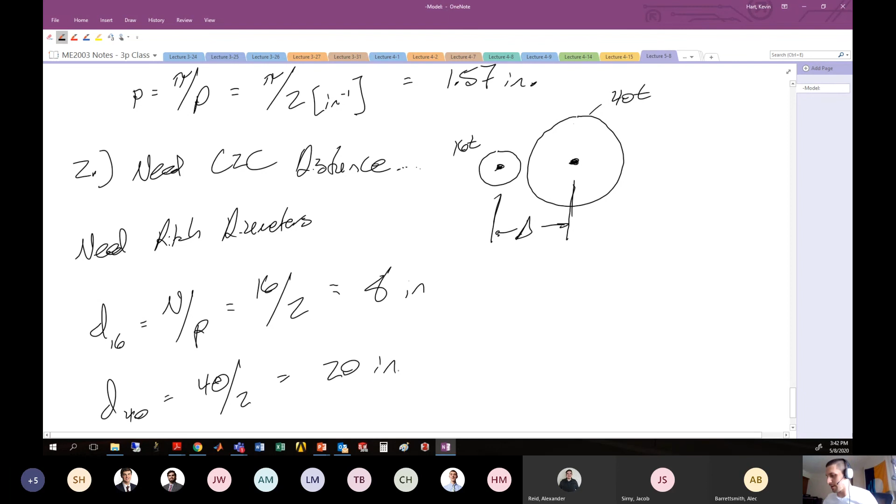Similar idea for the diameter of the 40-tooth gear: I have 40 teeth here. And because they are mating with each other, they must have the same diametral pitch, which is 2 inverse inches. So you're going to end up with 20 inches for the diameter of the 40-tooth gear. So this one has a diameter of 20 inches, and this one has a diameter of 8 inches.

If that's the case, then the total center-to-center distance, delta, is the radius of the 16-tooth gear plus the radius of the 40-tooth gear, which here is 4 inches plus 10 inches, which is 14 inches. So if you're anticipating needing to space these gears appropriately, you need 14 inches center to center between the two different shafts.

Bam! There you go. Introduction to gears, very simplistic, a lot of vocabulary, a lot of mathematical relationships that we have to get out of the way, but it is what it is. It's our first foray into gears, and there's lots of nomenclature associated with gears, which you will find.

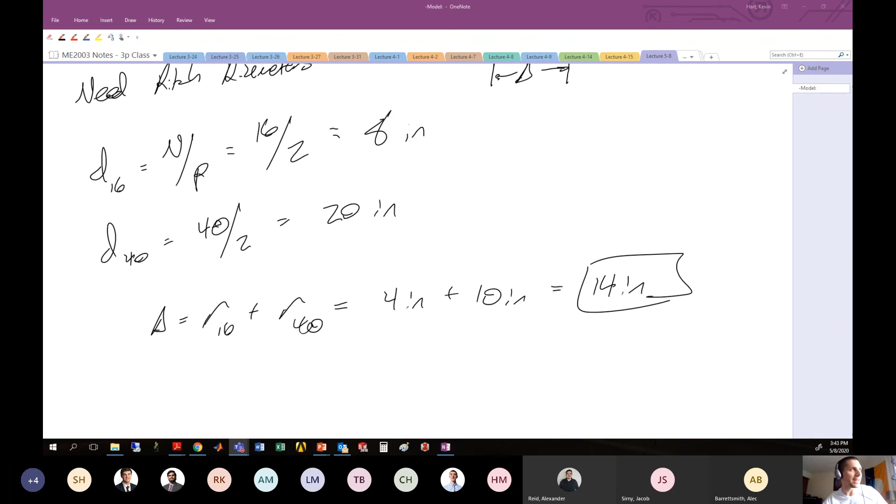Which is little p, which is big P. Lucas, capital P is diametral pitch. I know it's hard, it's really hard to show. This is a capital P, right? This is the diametral pitch. It is the number of teeth divided by the diameter of the pitch circle. Complicated. Little p is the circular pitch, which is the distance between teeth on the outer edges of the gear. I know, it's annoying.

Maybe I should do something special with the cap P and the smaller p. Maybe I'll figure something else out for next time.

Aaron, it snowed by my house today. That sucks. Yeah, it snowed here a little bit today too at like 11. I live downtown right by MSOE, because I'm lazy and I don't want to live far from work. Make gears great again. I just saw that. That's funny.

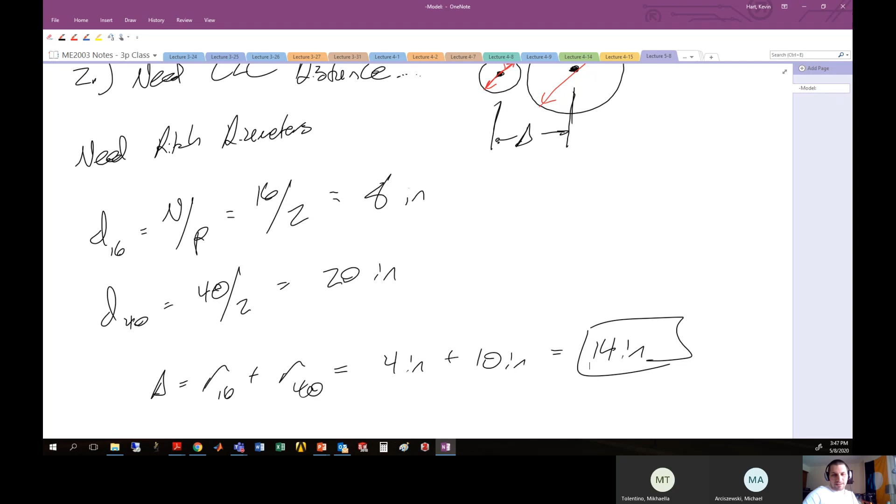But if they don't have a lot of students that need night classes, she'll probably teach the material science class. Otherwise, sometimes they hire adjuncts to fill some of those roles. I think they have a couple on retainer, though I don't know who they are very well. But I'd say the most likely bet is that either Dr. Barnaky or Dr. Schaefer will teach the material science class, though don't hold me to that. Okay, that helps a lot. I better stop this recording.